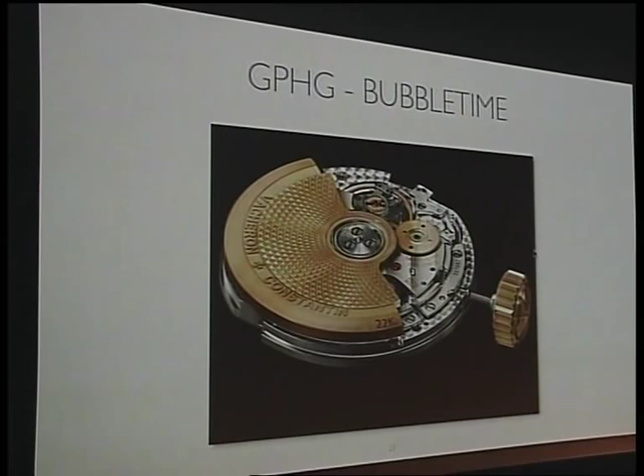So a little making of, showing some things. This was actually another project that we did before, and we could use this as a basis for making this robot. So we took this, we had it already in 3D in Blender, and we kind of took it apart, took the pieces and rebuilt a robot.

Some of the renders, these are just rendered for the first project. You can see all the little pieces that we had on hand to play with. And now we're going to pass again to Blender.

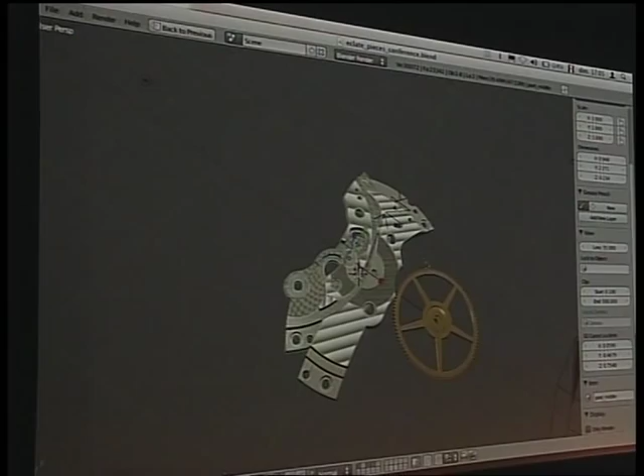So while Olivier loads up the file, I can tell you that this model is made out of some files that were delivered to the company before, for doing these renderings, the product visualization you've seen before. And at that time, the pieces were just coming out from the technical, the CAD software.

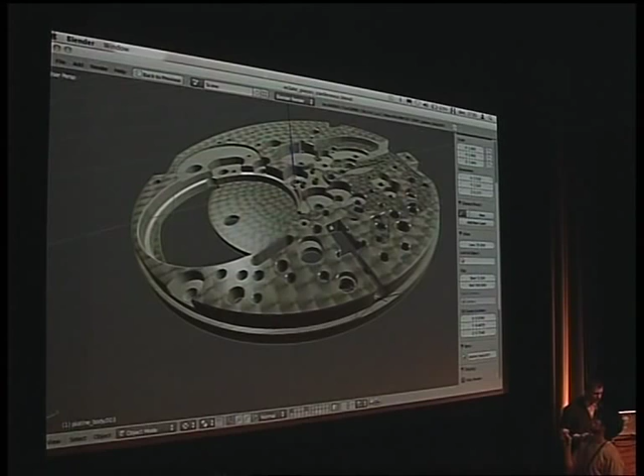So they were just converted and imported into Blender and maybe texturized a little bit, but they were very heavy, of course. So for a piece like this one, there were like, I don't know, 100,000 vertices. Yeah, I mean, this is the light version.

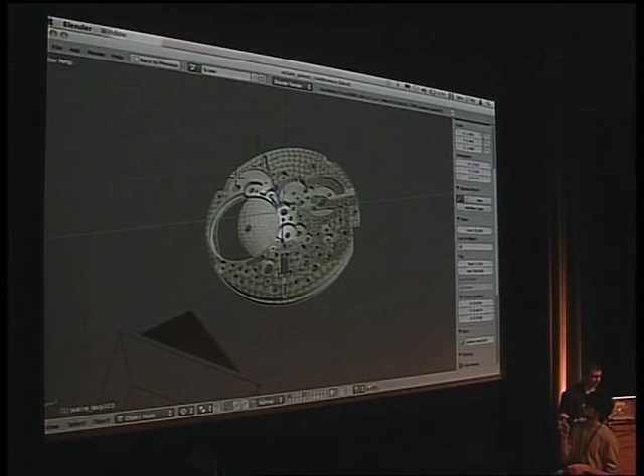So we had to spend quite some time for some pieces to either redo them or retopologize them or simplify them in order to make them fit in the rig, fit in the character, also to slow down... to speed up render times.

So this 100 megabyte robot is our model. For this robot, we actually had a proxy, low resolution version and a high resolution version.

This is the one we used for the animatic. So they share the same rig, and this version has the same dimensions and the same important parts that need to be seen when animated.

The other part is exactly the same, but it has more pieces and some drivers that make some automated animation, like some gears spinning automatically when an arm moves. Maybe Olivier is going to show you.

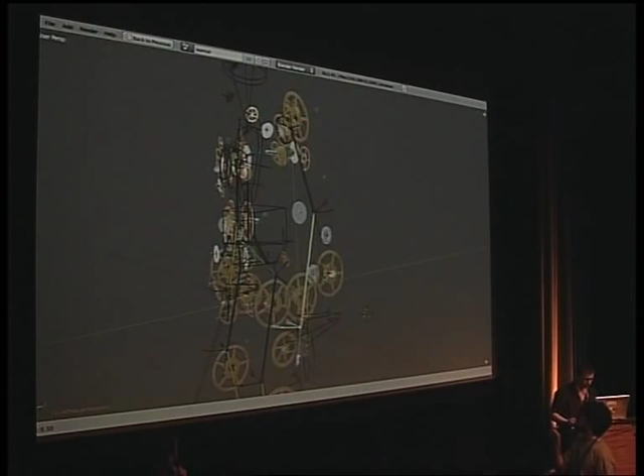Yeah, if he manages, okay. This is the layer of the gears. So for instance, if we rotate this, it's going to work on its own. Again, to add a little bit of subtle animation for free.

And yeah, something flips because this rig was not built on 2.5, so it was just ported and there are some issues. We are going to work on this again, so we will fix it in the next project.

So basically that's like driven actions, right? Yes, so that's how you drive the action of the moving. Exactly. I think Olivier did it, so I can tell you better - the wheels, the gears.

Yeah, basically. And so whenever this angle goes from this to this one, then you have to rotate the wheel. And so we could also have a mathematical thing where some of the wheels have to go the opposite way, otherwise they just crash into each other.

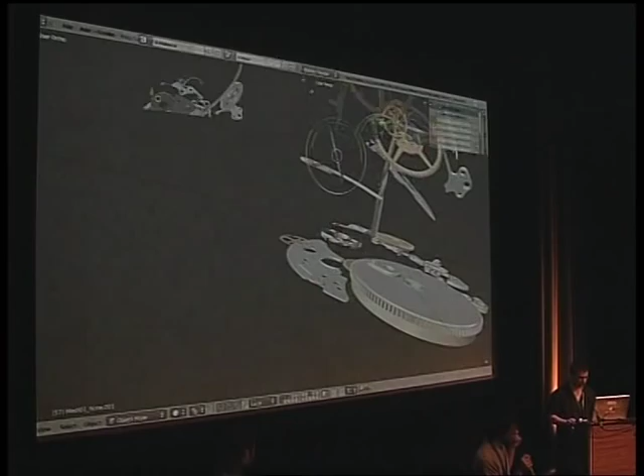For this one, we had to polish up a little bit. During the first week, we were putting together the model, and then I started doing the animation. You just saw the first one with all the spinning parts, which is one version of the robot with all the pieces almost hand animated. Meanwhile, I was doing the job of putting around all the gears, and Olivier was rigging it. So in 1 week, then.

So this, for instance, is the little piece. There are 4 pieces in the beginning that explode and raise. This is one of them, and then you just duplicate, so you have the 4, and you change the timing. That's also a way we had to deal with optimizing the animation process. We cannot animate 4 of these piece by piece, so we did one and changed the timing so they raise how we want.

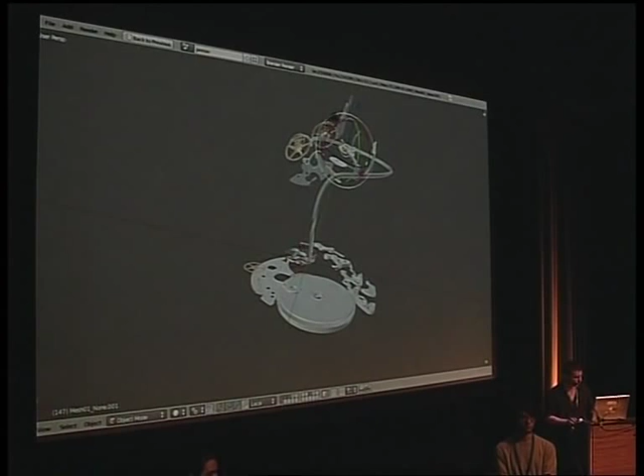For the rendering, I just wanted to do a little break. We used an in-house system that I built a long time ago, which is called Brender.

In a very small environment, as we are like 5 computers, it allows us to just dispatch the renderings, the scenes, and also to organize the work a bit, because we know which scene is being rendered, which scene we can re-render. It's very messy because I'm not a programmer, so I patched and created things on top of each other. It's working right now, but it needs a lot of installation.

Right, Francesco? Yeah, but it's going to get a very cool new interface, so all the programming problems are going to fade away in the back. Maybe. Nobody will notice. So another of these breaks, because we are going to pass to the third robot.

And so, if you want, I want to say hi to all my family, my wife, and everyone. Ciao, mamma. You know, Italians, they always have their mama at home watching them. And you, Pablo? Maybe, you know. No. You never know.

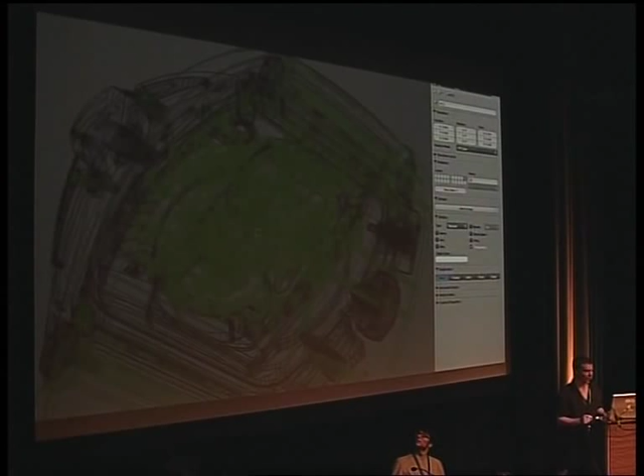So this is the first view of the watch actually in 3D, when you just get the files, you can see it's quite complicated. Had to clean a bit, and do some basic things like understanding how this file is done, which piece belongs where, what is important, what is not, all these things.

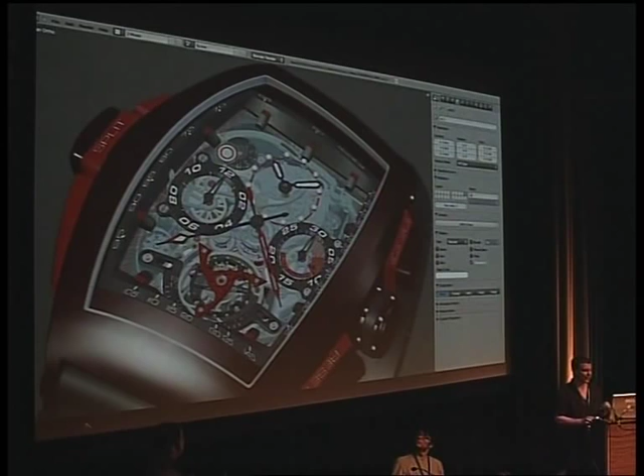We need to also sometimes ask the watchmaker, hey, is this actually metal or plastic? Is this moving? Is this not? So that we know a bit what exactly is this watch. After that, we ended up doing a rendering.

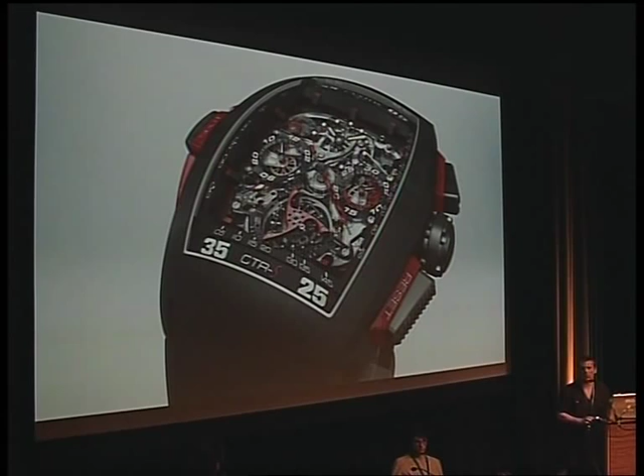And so, actually, from this kind of watch that you have, how do you make a robot, Pablo? How do you make a robot? You open it. Yeah, that's one of the most complicated parts, is how to understand how it's made.

I don't know the number of pieces, but it's really a pain, and you have to start thinking ahead, imagine how the robot will look like, and okay, what we can use. We have to make legs and stuff out of it, like arms. So you have to think, okay, we can use that for the arm, and maybe that for the back of the legs, and maybe we can split this.

The idea at the beginning was not to cut much, to try to keep it as complete as possible, but then, no, it's not possible. Where do you put that thing? Or it's just all these little tiny pieces there. It's just too complicated. So you start to merge some objects, to clean some others, to not use some parts, to make your own parts.

Yeah, you have to cheat, of course. And also to use the same part two or three times. That's also cheating. A lot of cheating, yes.

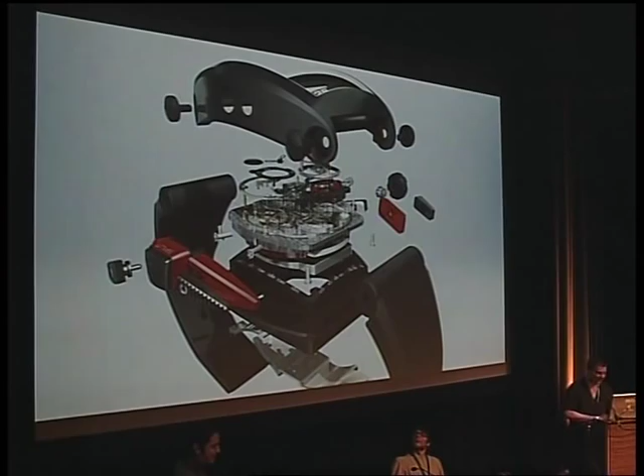Wow, it's insane. So, for example, where did all these pieces come from? I remember some of them, like the back of the watch, that one is really clear, we had to use that one. But still, you get the model and you don't really know how it's built. Sometimes you get watches that aren't even made yet, so you don't even have a real thing, so you have to guess.

And in this case, you built this part. So how do you do it? I think you try, you see if it works, and if not, you erase it. You take another part, you turn it and you scale it. No, scale it not, sometimes.

Oh yeah, that's another thing, you have to fake a lot. Like suddenly the piece that was really tiny has a really cool shape, so hey, what if we use this a couple times? And then suddenly you have the little needles, like the size of the leg or the size of the wrist. I think this red part is actually much smaller.

Wait, but it's so cool because it has all these details in it, so we have to use it, put it everywhere. So nice. But you also have to give a style to the robot and try to resemble the actual watch, right?

So you have to think, okay, what's the most important? What gets your eyes on the watch? Whether you remember it after, if I show you the watch quickly, then I hide it, okay, what do you remember about it? It was red, it was cool. Yeah, it was fancy, it looked expensive.

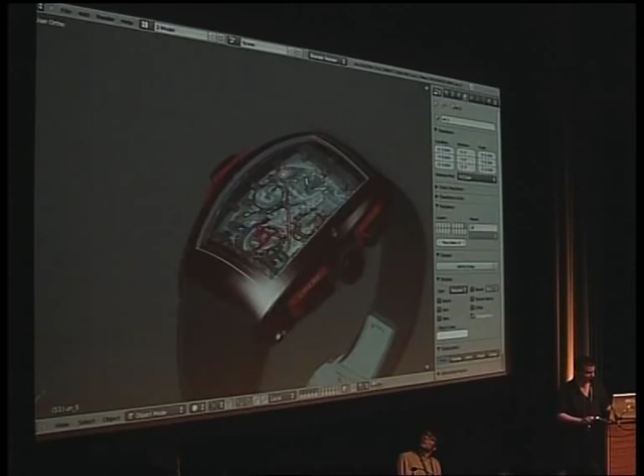And then yes, that's how you try to build and speed up the whole process, because you have to work with that, you have to make something out of it. So you end up removing a lot of parts that I don't think the client even knows about. Where do you put all these little tiny pieces? I don't know, hey, have a face here. Yeah.

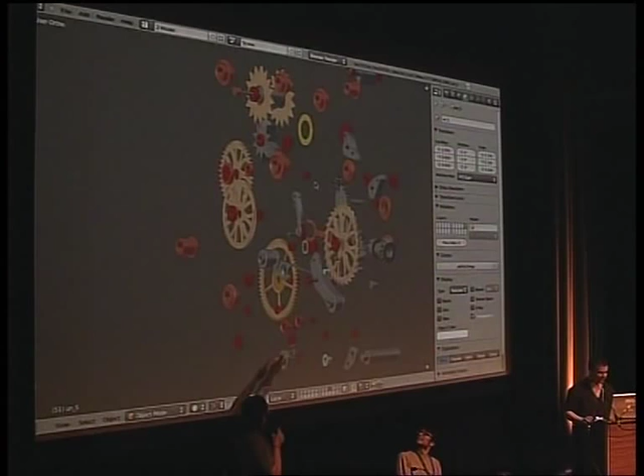So now we're going to look at the robot itself.

Yeah. I wish. I think it would be like 50 times the price of the movie or something. So yes, I want one.

You can get funding for the next movie with selling one of that. Just one, yeah. I think we could make a lot of durian movies with one of these watches. I don't know, it's just amazing.

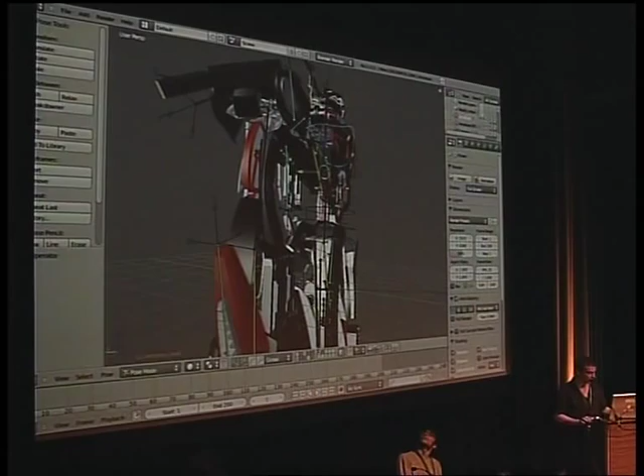So that's the robot now in its nearly full form. There are some pieces missing in the inside, so I'm going to find them. So that's the full version.

And I have to say that we are now using 2.5, and it's always on the same computer, but it's actually kind of answering. I mean, you can turn things around, and in 2.49, no way. It will be like...

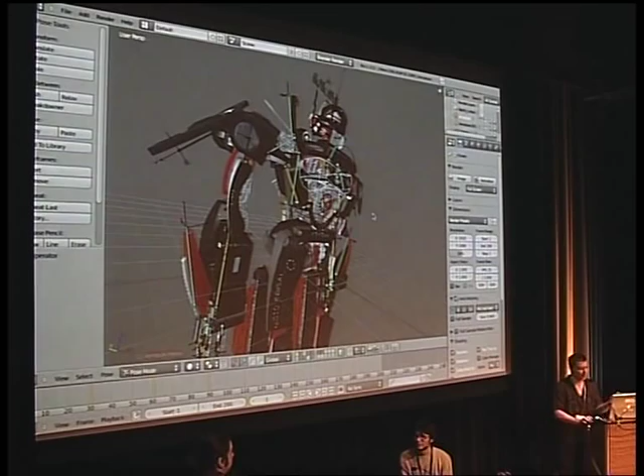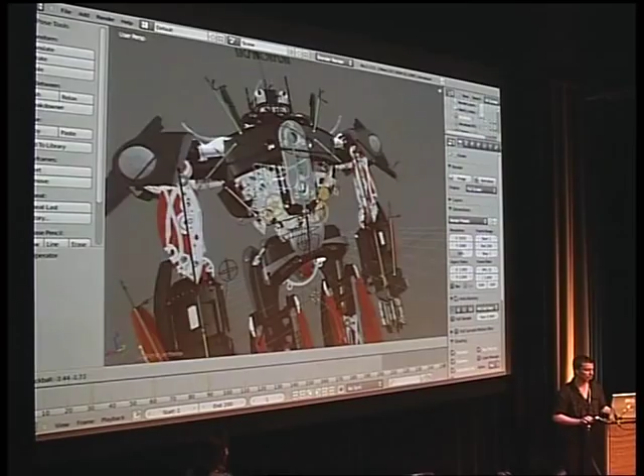So I'm just going to show quickly some of the rigging things to give it a bit more mechanical parts. We did not have the budget to do every piece moving for real, so we had to find some ways to cheat, so you can see some of it moving a bit, and also, but that's a secret.

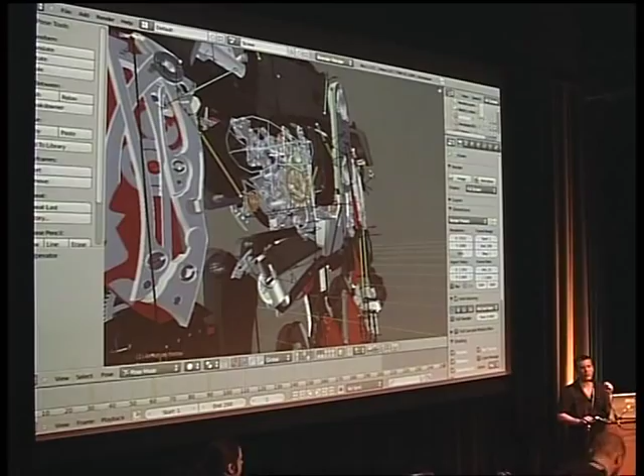Sometimes they overlap, but we don't show it in the movie, and that's also something that in production is very useful, clever to do. You just know where your things are, and you focus on what you see. So, and what works, and when it works, yeah.

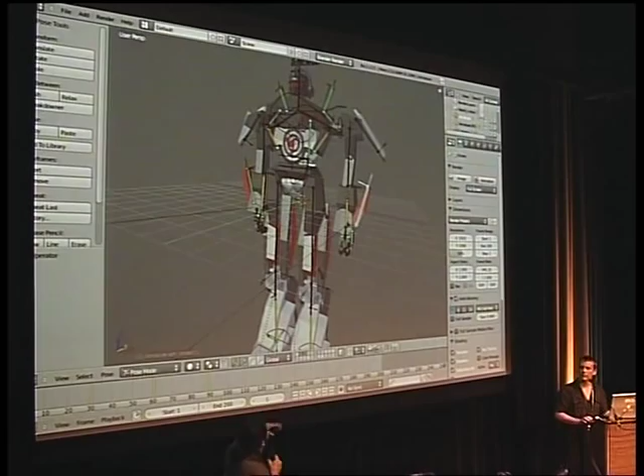Again, for this one we also had a simplified version because we needed to animate. It really helps a lot when you want to make fast, real 24 frames per second animation, you can move the whole thing. You miss a little bit of the details, so that's why sometimes on the final product you see some overlapping pieces, because of course you work with a low poly version, and if you don't check really fine detail of all the overlapping objects, you get issues.

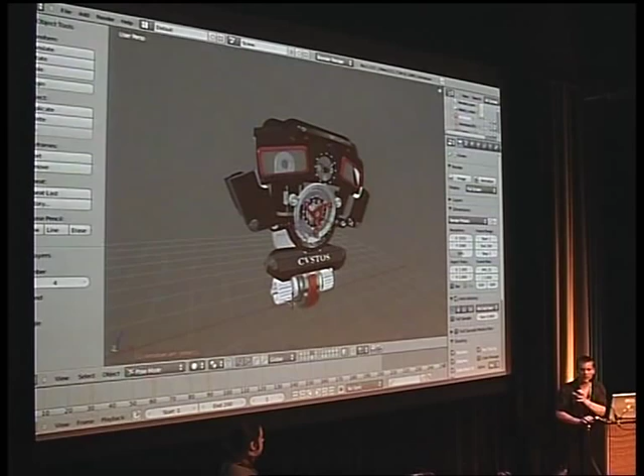Whoa, what's that? So again, for instance, this is the chest, and also when you're making a robot of this kind of product, the thing is the client has to recognize his product, his watch. So of course we have a lot of small gears and metallic parts, but we also had to find the main features of the watch.

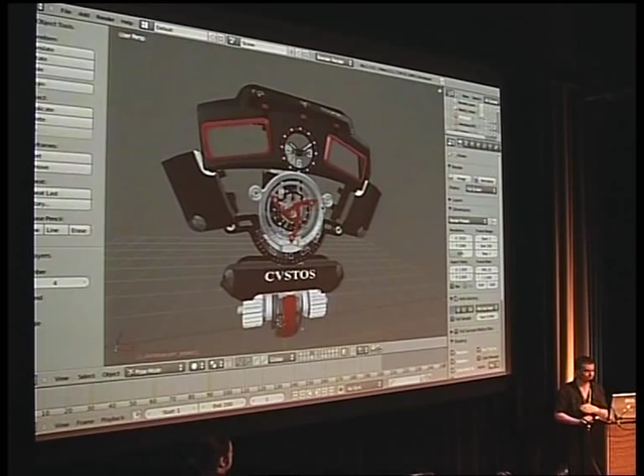So basically this is called a tourbillon. It's like a turbine, right? Yeah, something like that. It's the thing that gives the movement to the watch, and it's a very complicated thing. But this is also what gives the price to the watch.

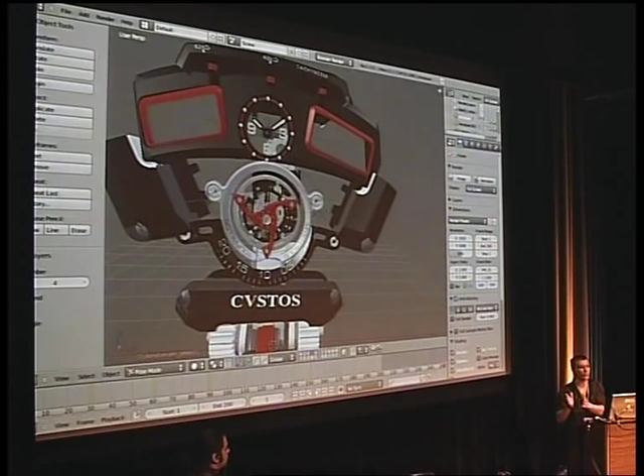It's important, and this is the thing that actually gives the time, because this watch is a chronograph, so it can count how many seconds passed when you are running around the house. But this is only the main thing; giving the time is the secondary function of this watch. So it's here. It's true, it's sad, but it's true.

But also that piece, the shape of that piece, is also sort of the trademark for Cvstos, right? Like the really masculine shape, and it's black, their style, and it's their design. So you have to keep that in mind. Not you, but us. For the client, we're happy.

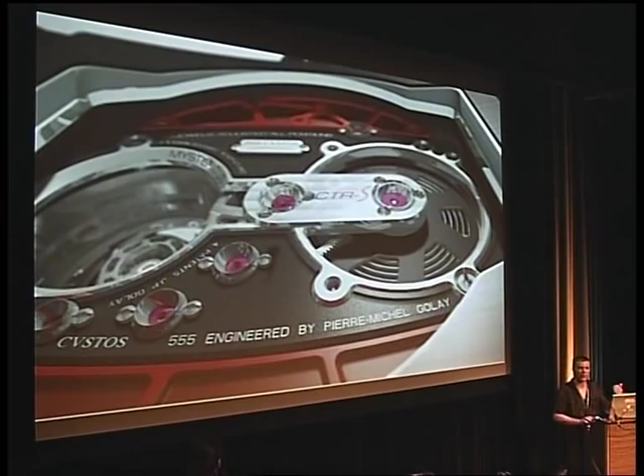So, okay, here are some other renders that we did also. Sometimes in the middle of the process they ask, can we have a render of this? Because we are going to make an advertisement in a magazine or something. So we took out some.

Again, just to see the differences, but at the same time the inspiration from this watch. You can really see the red parts here, I think this piece, the Cvstos, of course this is the name of the company. These red chest things are here, like the little frame of the buttons, right? Mm-hmm, yeah, of the buttons. Sort of. Yeah, and look at this.

Ooh, what is this? This is a screw, but it's not. That's from the model. Yeah. I think the screw in this case would be something very hidden here somewhere, holding one piece. Maybe it's even here, the one holding here.

So you see, I thought it was the ones on the side, but since you have the thing covering it, you don't really see it. So, but on the inside, it looks cool. If you break your watch and look inside, it's actually pretty good.

We can see the watch because, as I said, we also had to do a real-time model of this watch because they wanted to show all the new things that were in this watch. So let me just load it.

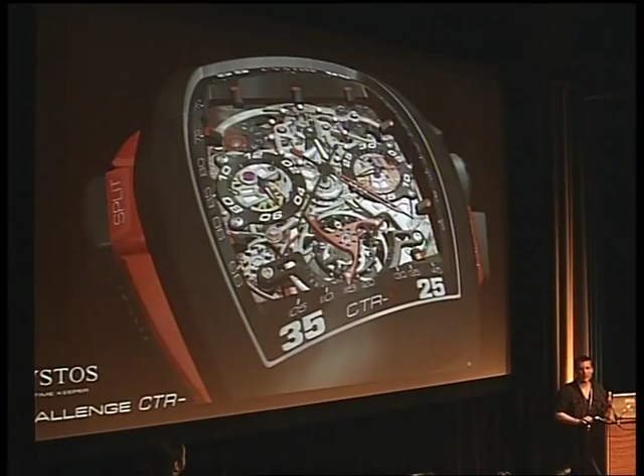So we recreated this, used this watch, and we didn't have time to optimize it. So it's going, it could be much faster, but it's still going.

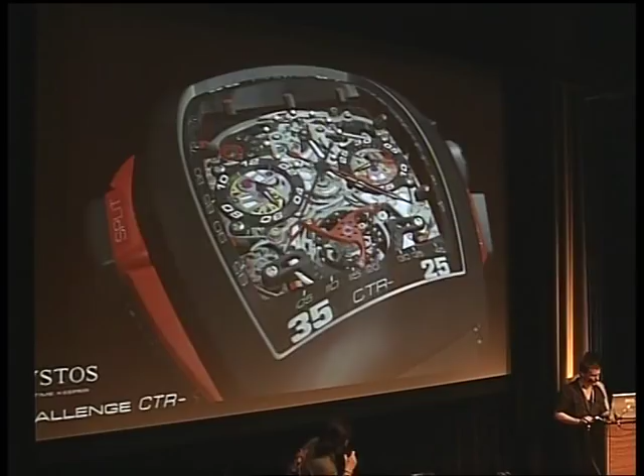Did it touch anything here? Yeah, here. Actually, I remember the first time you tried this, you weren't even supposed to do it. It was just fun. Okay, let's press P to see if it loads. And then the client got excited. That was also really good.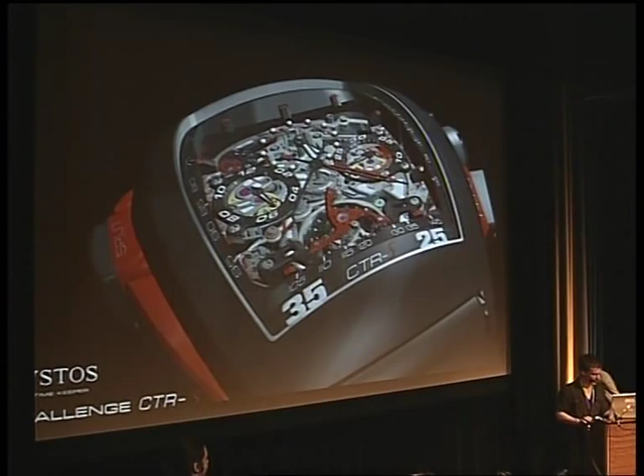Nice, yeah, so this is true, 2.49's. Yeah, because we got excited with the, let's see if GLSL can handle it. Oh, awesome. Yeah, and then, yeah, looks good.

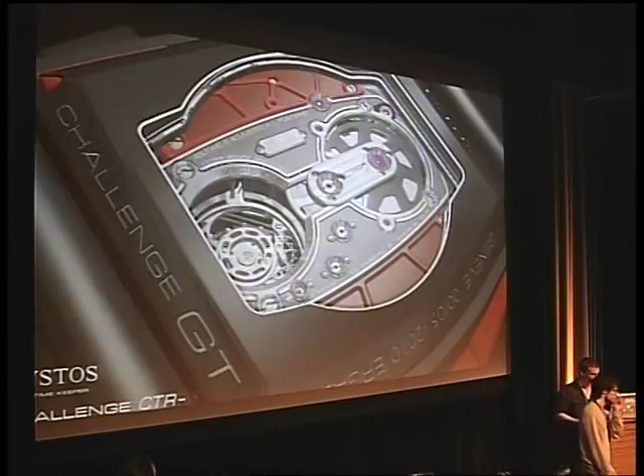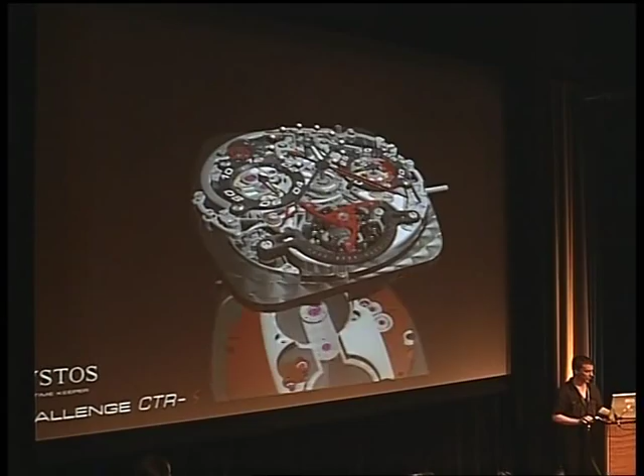I think, yeah, like here, there should be this special effect of this piece. And so there are things like you can go watch the front or the back, and you can also open it like this, too. The thing is quite complicated, so we had to have layers so that we can take out the pieces, and you can see that now it's going much faster, the actual velocity.

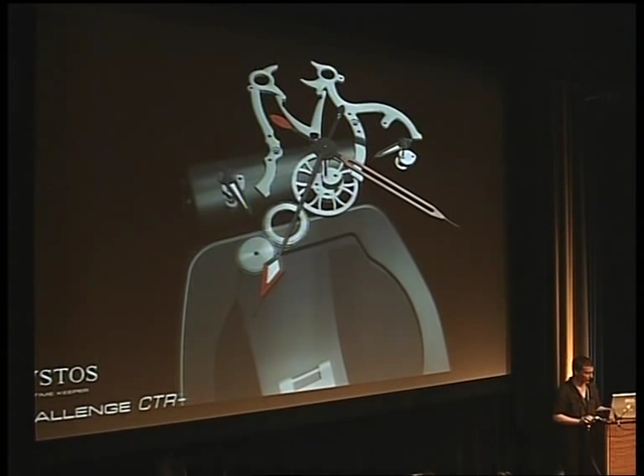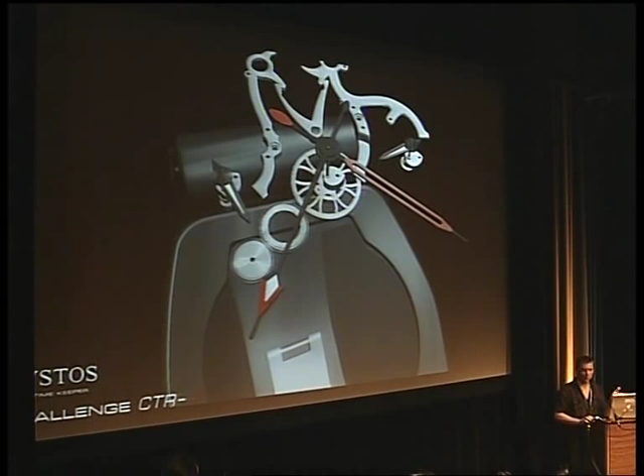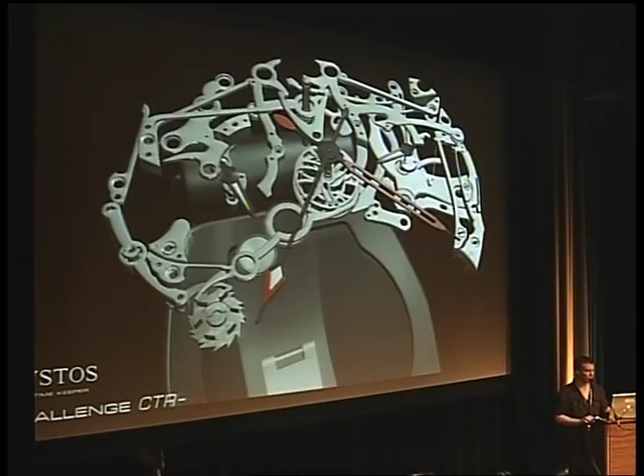Okay. Any questions so far? We have 5 minutes left, I believe. Yes? Can you play the animation again?

Yes. Whoa, what's that? Something, I don't know. You have free time again, right? When it's rendering, rendering, Pablo, not free time, rendering. Oh yeah, it's work. It's work. It is, actually it is work, you know.

Is it? I don't have it here, but they loved their robot, and they had a party also. So this is one of these animations, not the 5 together. But one of these, for the VJ, they had this party, and we did, I think, 5 or 6 loops of kind of dance, going around, turning around, and the VJ could say, okay, I want this, and he adds it with live stream from inside the discotheque.

Do you use live reference, like you tape yourself for video or something? Ah yeah, definitely. He used reference, yeah.